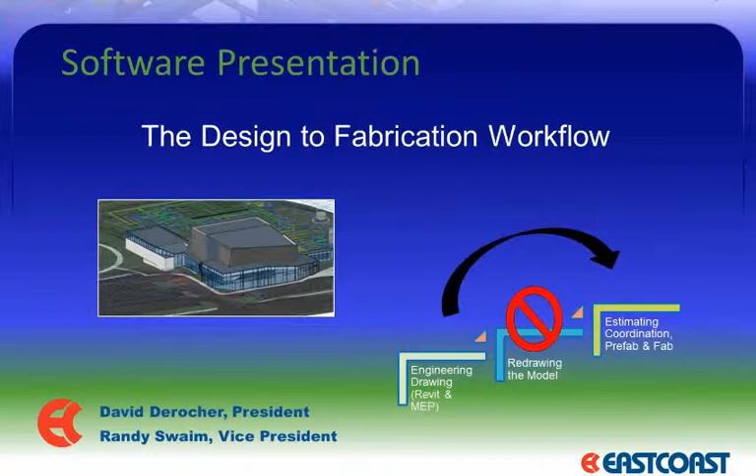And with that, I'm going to switch over to Randy Swaim so he can give you a presentation of how you can take advantage of the 3D engineering drawings that are becoming available. Thanks, Dave. We're going to take the design to fabrication and be able to bring the Revit model into AutoCAD MEP and assign it intelligent fabrication data up to 30 times faster than the traditional method of bringing in a background and drawing on top of it.

Now, we're not under the delusion that you can bring in a Revit model and just push a button and have it ready for fabrication. But you do get a good layout, and you can have an established workflow of how to go through and correct issues not caught by the engineer or not known by the engineer. In almost every instance that we've sold the design to fabrication software, we've taken a client's model, brought it in, and showed them the established workflow. In some cases, we've brought it in internally and then had our client bring it in theirs, and they exceeded our benchmark testing. So they've actually brought it in faster than what we did internally.

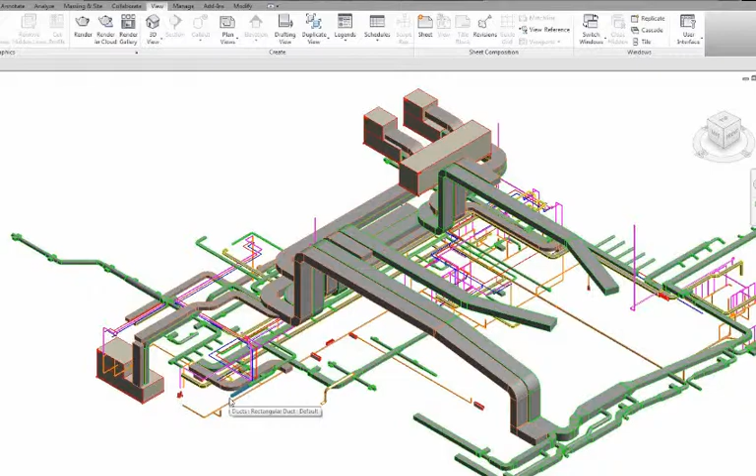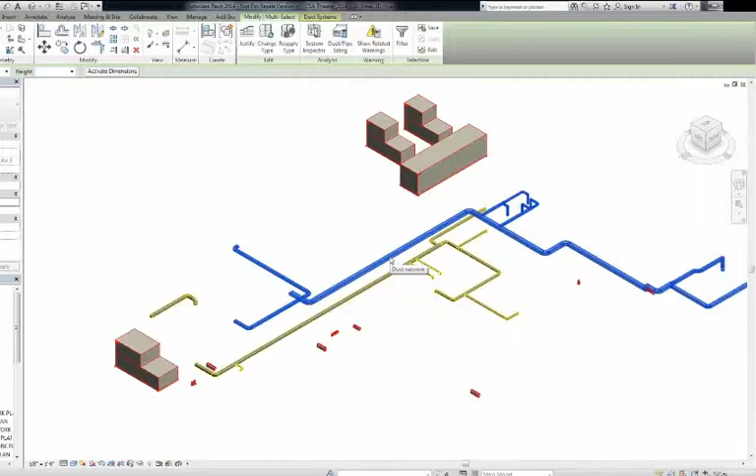So to demonstrate that, I want to take this Revit model and start bringing it into AutoCAD MEP and assigning it intelligent data as we do. As we look at the model, the first thing I'm going to do is come up here to the view, go to my filters, and turn off some of the items in the model so that I can just import a particular system. In this case, I'm going to start with exhaust. If I highlight over the exhaust and hit my tab key, that makes that selection. Now I just come up here and say I want to export this selection.

And as I export this selection, I'm just going to overwrite the file that I created earlier. So I'm going to make this my exhaust, and yes. Now I can come back here and say I want to hide that element, so when I come back to get the rest of that exhaust, this other is not already shown.

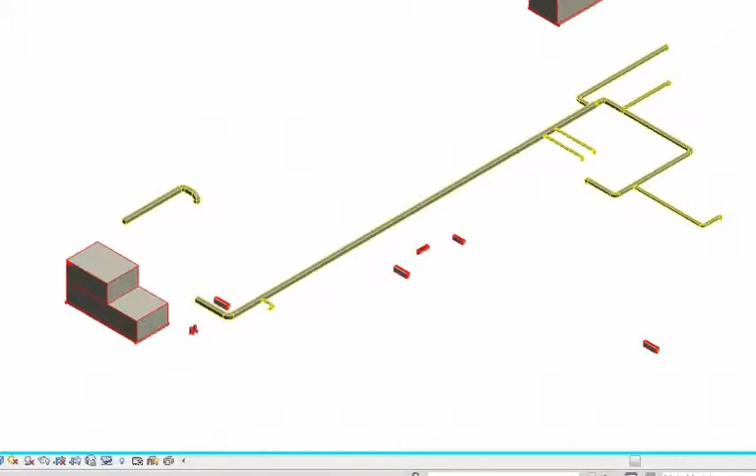So now I'm going to jump into the AutoCAD MEP platform, the preferred working platform. And as I move back over here, I'm going to come back in here and tell it that I want to bring in my duct. But before I do it, I want to show you what this is looking for. So if I go over here to duct fabrication preferences, it loads up here that I'm going to bring this in as a 2-inch water gauge spec. But I can have multiple of these setups set up into any folder I want, my low pressure, medium pressure, high pressure, and bring it into whatever pressure file I choose to.

So I've got it set to come into my 2-inch, so all I'm going to do is come up here to go to my insert. I want to insert a Revit model, and there's that exhaust. And we're going to let that bring that in. And you'll notice down here in the lower left-hand side of my screen, there's a little status bar that's indicating the percentage complete. This little exhaust model might take a minute to come in.

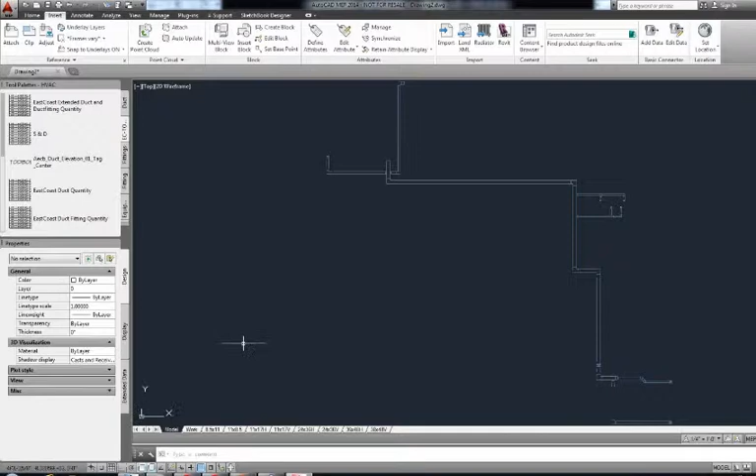But when it brings it in, it's assigned intelligent data. It knows that it's got slip and drive connectors. It knows that it's a certain gauge and certain locks, everything that's going to be needed for fabrication. And you can see that's brought that in.

I'm going to go ahead and flip this over into an isometric plane, and I'm going to run another command on this. So I'm going to come right back here to home and say, let's go through here and break this down into my fabricatable sections. So based on the connector type and our sheet width, in this case we're using 60-inch sheets, and it's going to be a slip and drive connector, so we're going to end up with finished joints, or 59-inch joints in here. So we'll let it go ahead in there and run the duct break on it.

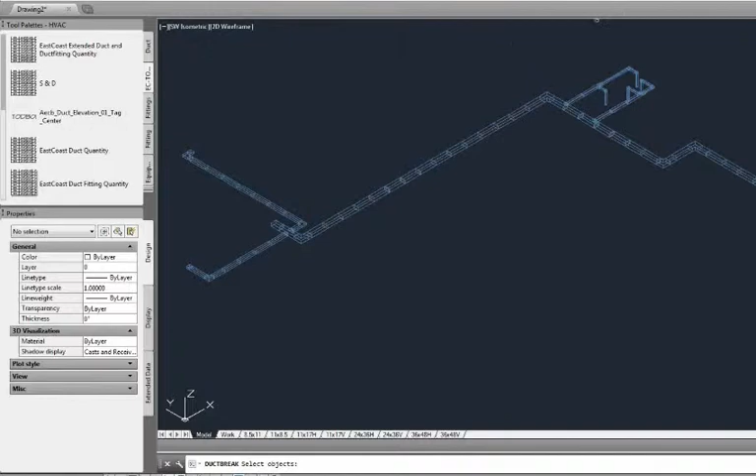And then as we move back in here, if I click on any one of these parts, there's that elbow right there, and I go to the Extended Data tab down here, here's all the information of how this ductwork is being fabricated. That was assigned from basically a dumb model coming over from Revit.

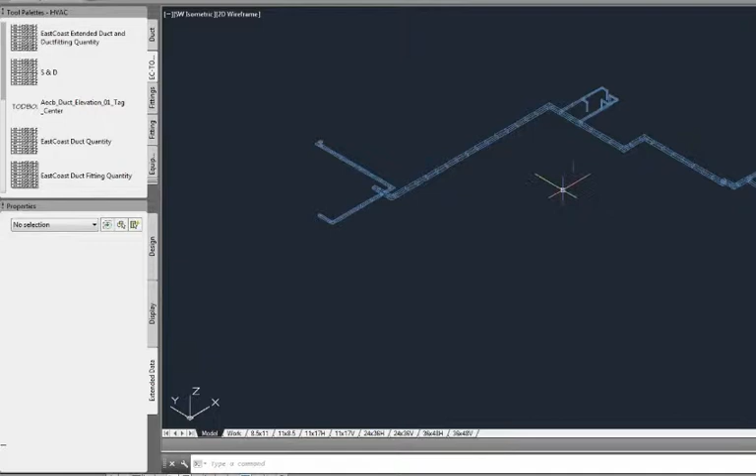But we want to come through here and we want to establish our workflow and clean up a few things in the drawing first. So if I just come down to my command line here, I'm just going to type in display, and I want to go ahead and add a display theme. I've set this display theme up to come through here and highlight for me joints under a certain length. So I can make decisions of what I want to do by clicking onto a joint and saying, well, maybe I want to go ahead and add that to the throat of that elbow to eliminate that short piece.

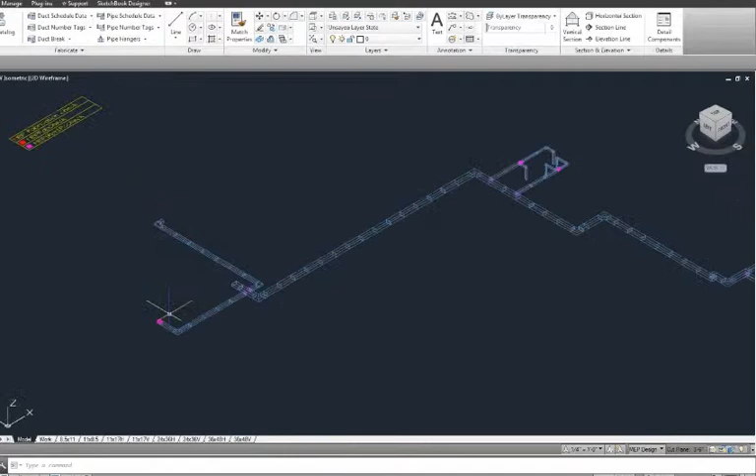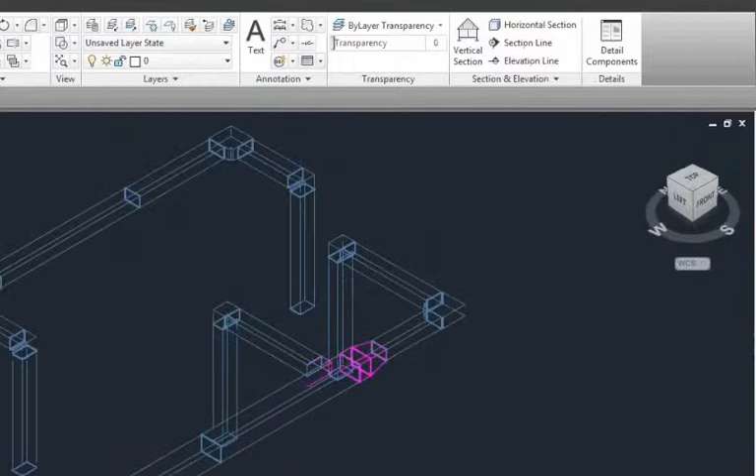When I move into a scenario like this, maybe I need to have that end at that location, but I can also move this along the line to put it back here, or I'll say go ahead and add that to the throat of the elbow. As we move down our model, I'm going to go ahead and make these corrections. So I'm going to click on this short piece and say I want that to be added to my transition. When I come over here, I'm going to do the same thing on this one. I want to add that to my transition.

And now we'll just move over here. We've got a couple more pieces that I want to correct. There's a very short piece I want to add to that elbow right there. So I'm just going to go ahead and modify that. And then here it looks like they've got a short piece here I want to get rid of. So I'm going to go ahead and modify that.

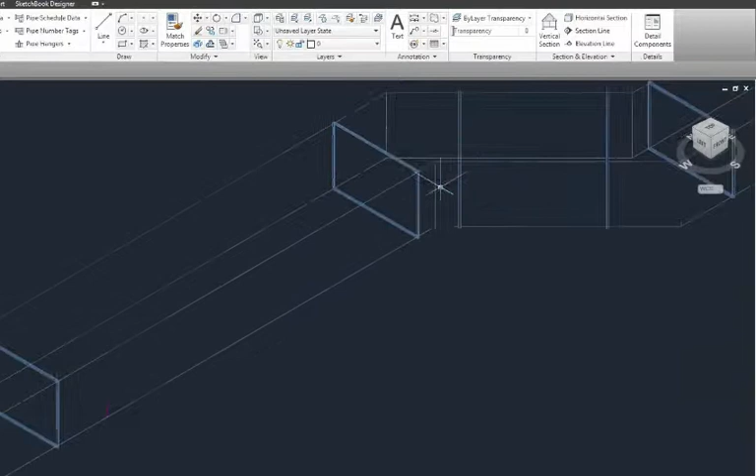But here they've used, it looks like, 3 fittings here to do a little offset. I'm going to take this offset and just get rid of that by hitting the delete key. And now I'm just going to go ahead and click onto this piece and click onto this piece. And up here now I can tell it what kind of fitting I want to insert in there. I want an Ogee fitting.

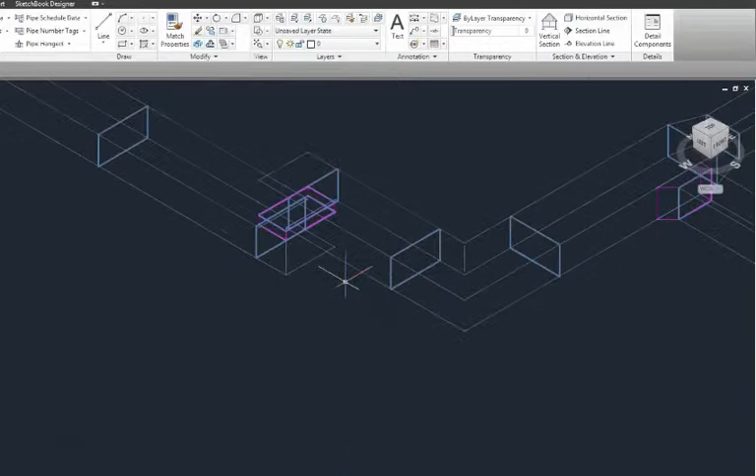So I'm going to say go ahead and apply that. So that's applied that fitting for me. As I move back down here in the model, I also notice another scenario here where they've added quite a few pieces in here I want to get rid of. So I'm just going to go ahead and select some of these pieces to delete. And I'll get rid of that one as well.

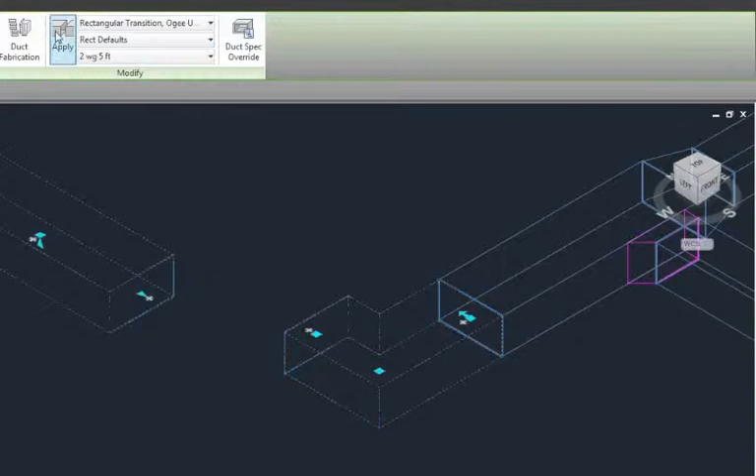And now I'm going to come back here and I want to add that in. So if I come back here, click and click here, we'll just come back over here and say now we want to add in an Ogee offset here. We got rid of 4 fittings and replaced it with 1. So now we have our model here. And I'm going to go ahead and set this back into plan view. So I'm just going to go ahead and hit the top view here. I'm going to spin that back around to the position I want it in, and we'll set that up here.

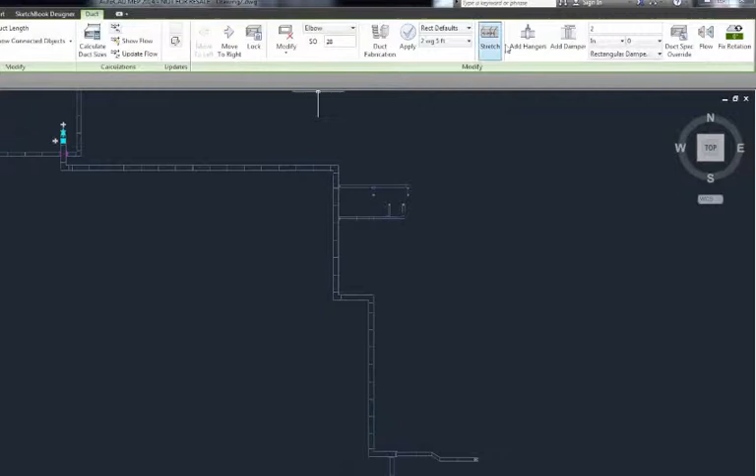So now as I come back here, maybe I want to come back in and add some additional information here. Maybe I need to add some hangers into this. So by just clicking onto a piece of duct here, I can come back in here now and tell it that I want to add my hangers. So as I go to add hangers, I can give it all the information about my hangers. I can give it the elevation I want to hang from up here.

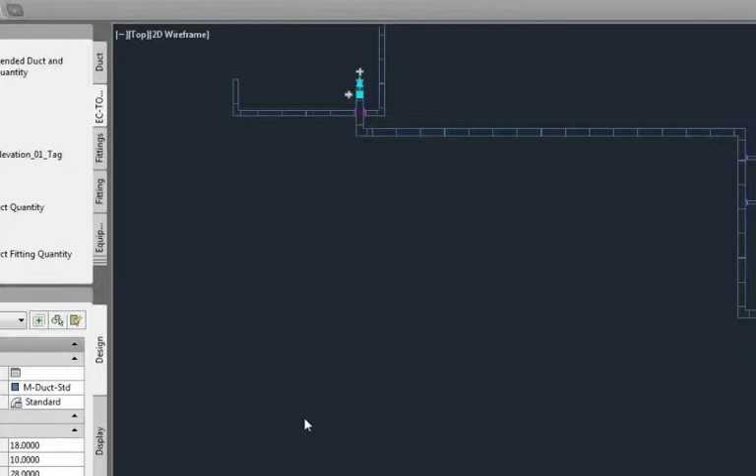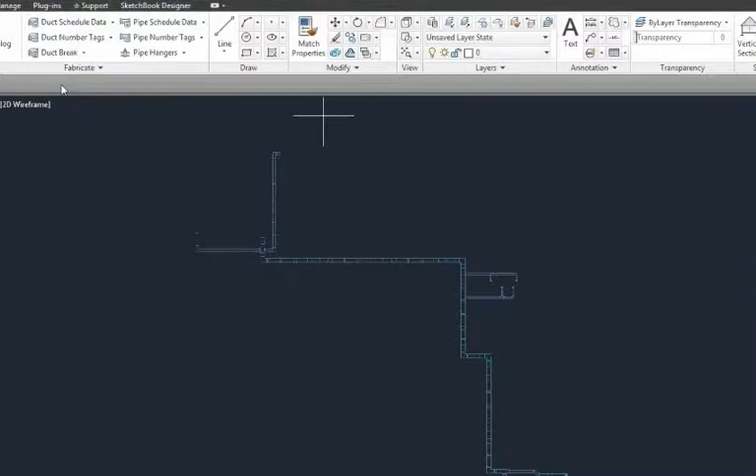But now maybe I want to come back and put some part numbers or some text down on this. So by coming back here, I'll say I want to put part numbers down. I want to go to my duct part number. I want to attach that to the model. And I have lots of variables here about how I number the ductwork. Different frames to put the numbers in, how many digits, do I want to assign a system to it, what type of duct do I want to number, a lot of different information. I'm just going to go ahead and hit OK and then just touch my first piece of duct there and let it go through the numbering process.

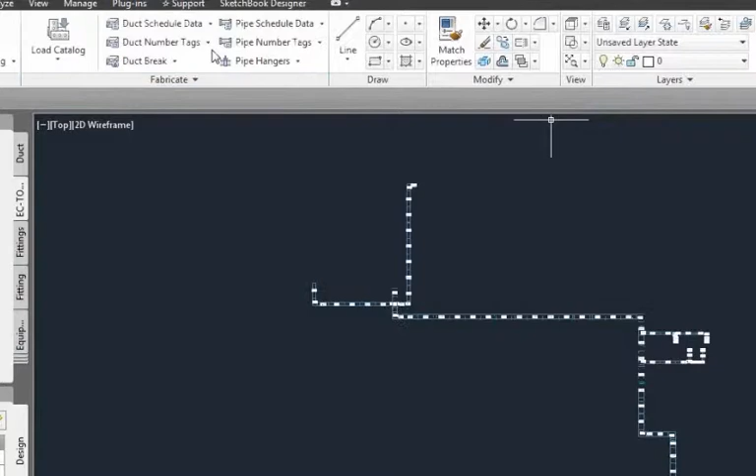We also have the ability to come in here now and say maybe I want to auto tag part of this. So simply by coming over here and selecting part of that run, I can have it put automatic text information here for elevations, sizes, etc.

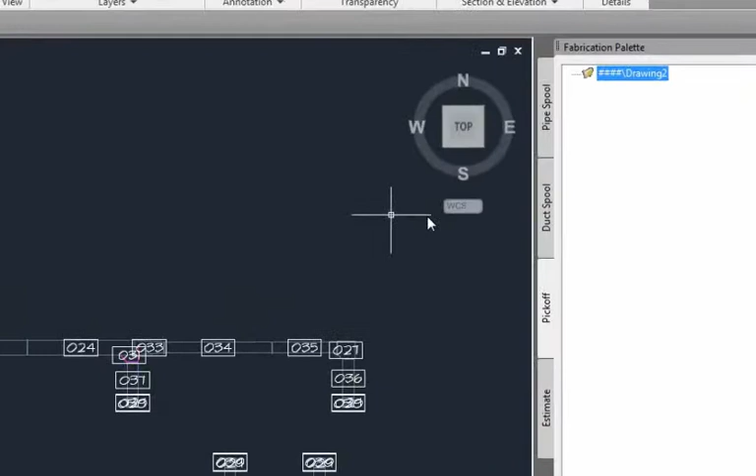But when I come back now, maybe I want to start fabricating some of this in my shop. So I'm going to go back here and open up my fabrication palette, and I'm going to come over here first of all and say maybe I want to create a duct spool, and I want to add a new category, and I'm going to rename this category to be Exhaust 1. So we've got that as our category. Now I'm just going to say I want to create this as a spool. So maybe I want to take, let's say, these two pieces of duct and that tap right there, and I want to create those as an assembly.

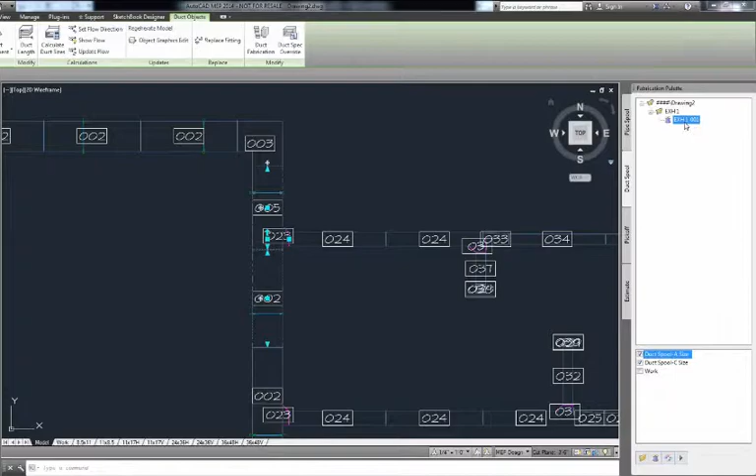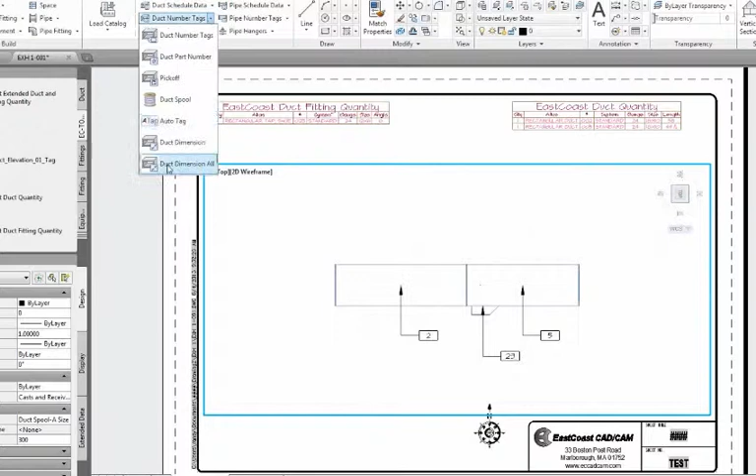So as I go ahead and right-click, it now can generate me a drawing on that by just clicking Generate and then clicking Open. And now I've got a drawing here with the two pieces of duct and my tap, with the cut lengths of the parts and the counts of the fittings. But this is a viewport, so I can say, well, I'd rather see this maybe in a plan view, maybe running this way, and now go back and reattach all the part numbers. Then maybe I want to add the duct dimension as to where we cut that tap in. So just that easy, we can create fabrication drawings of manifolded systems. Next, maybe I want to take this right down into fabrication.

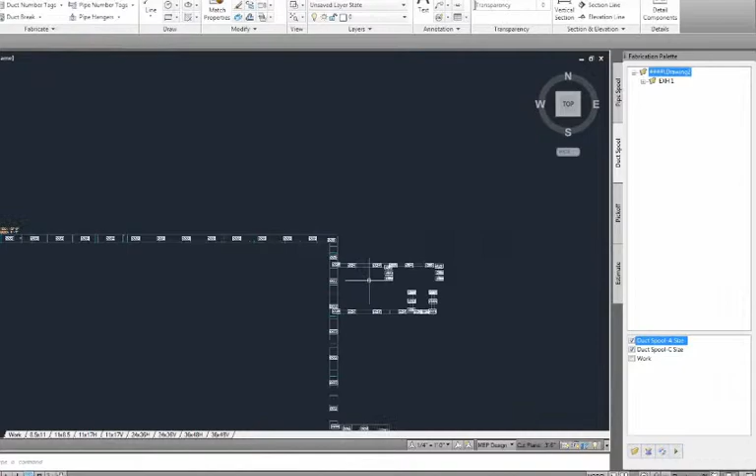So I'm going to come over here and I'm going to say I want to close this spool drawing. Let's go ahead and close that out. I'm going to come back now and say I want to do a pick-off on this duct. So as I go back to do a pick-off here, again, I'm just going to define what I want to pick off and tell it, do I want to pick off both numbered and unnumbered, the shapes, the statuses, and we'll go ahead and we'll just select that.

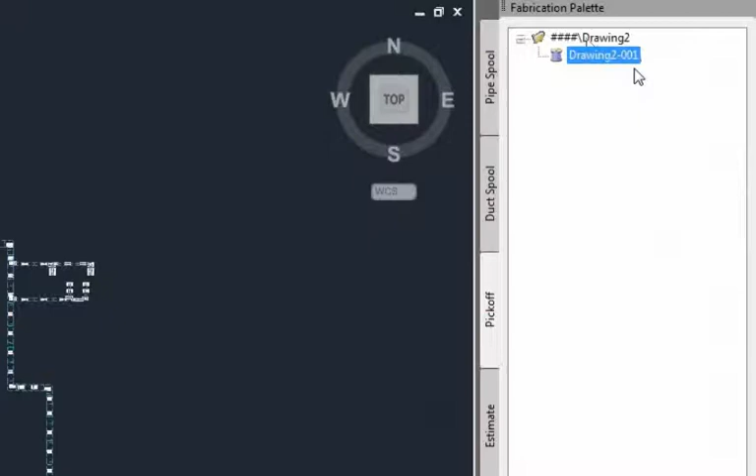And now that's created me a pick-off file over here that I can now come back and say, let's generate that file and send that into our CAM software. So by going ahead and hitting Generate there, that's generated that file for me. Now on this elbow right here, that's elbow number 41, we extended that throat quite a bit on that.

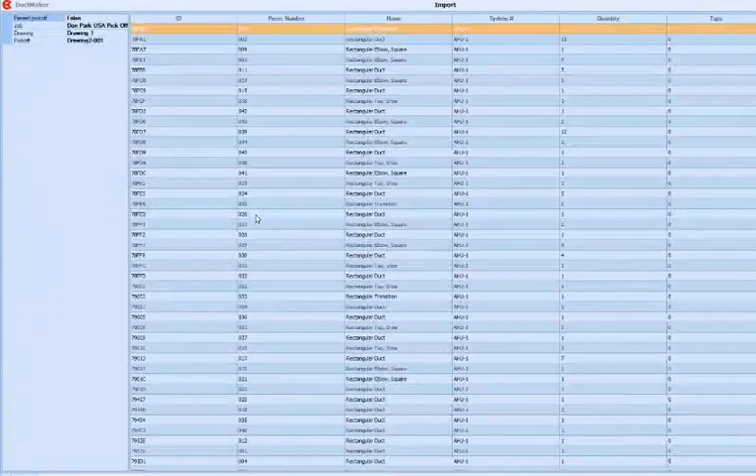If I move down here to my DuctMaker program now I want to import that into my CAM software. So I'll know that that's going to be in my documents and under my drawing 2. And as we come back in here, we'll see here's today's date with that pickoff. So I'll go ahead and bring that in. That's brought all that information into the CAM software. This is now ready to nest and create tickets and various reports right out of the CAM tool.

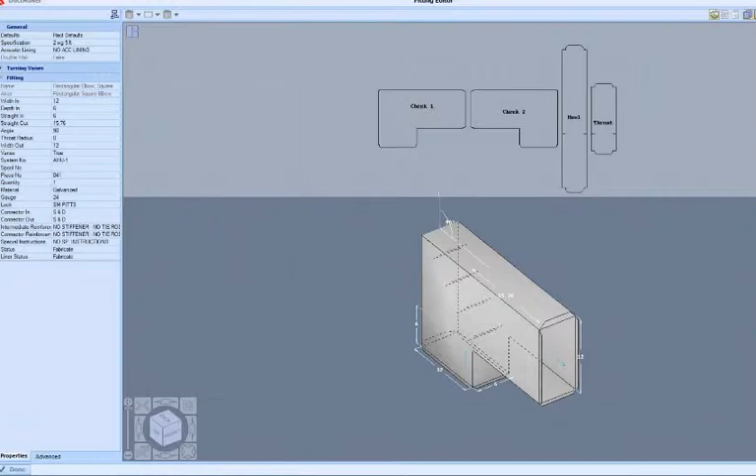And if we come through here and we look at elbow number 41, as I move down through here to find that elbow, I'm going to see where that one is, and we'll just look at that. And now you'll see that that brought that in with the extended throat on that. So that's all been brought into the CAM software. We simply just go to Layouts, say now go ahead and create the nest. And now it's going to create all my nesting diagrams for all that ductwork. And now the tickets, the reports, etc.

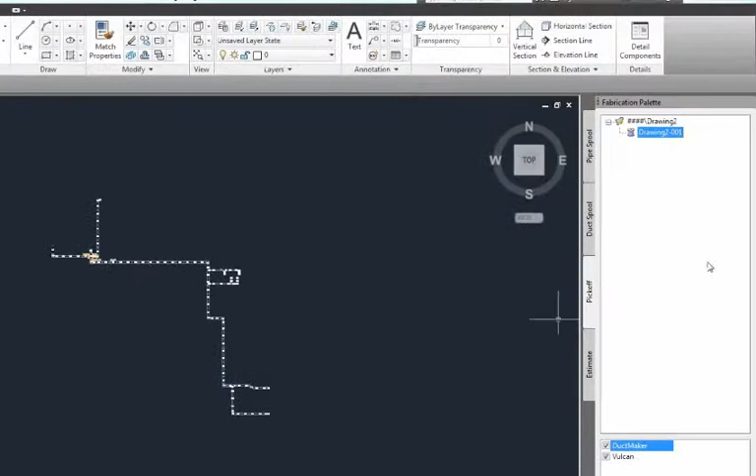But I want to go back into the model now, because now I want to take this and I want to send this out to estimating as well. So I'm going to come over here to Estimate tab and just say I want to attach my estimate data. So as I go ahead and swipe the model here and enter, that brings up my work structure breakdown.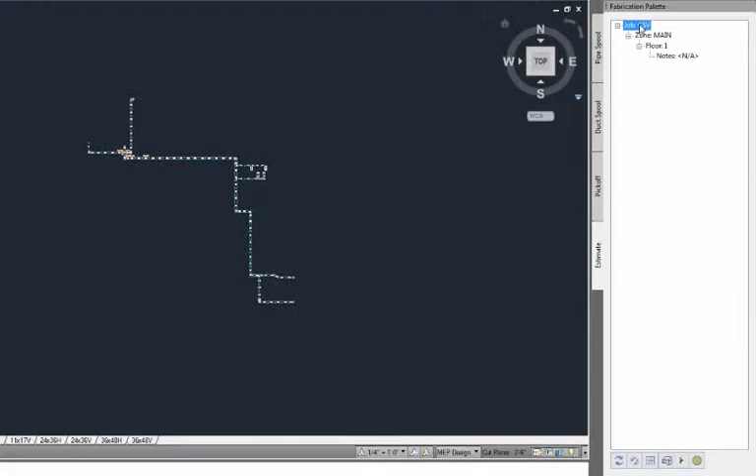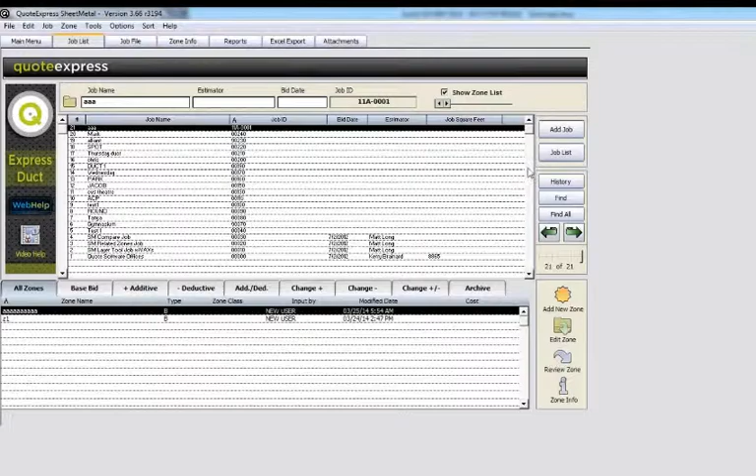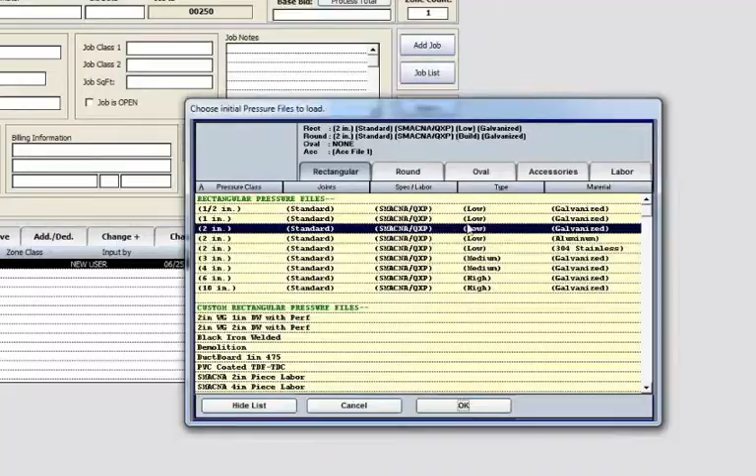Now from that point, I can come back and I can open up the QuoteExpress SheetMetal estimating program. I'm going to go ahead and maximize that. And I'm going to go to my jobs and I want to add a job. And again, we're going to just add this CSV job and OK. Now when I come back over here, I want to add a zone. And again, I called that main. And we'll just OK that. So now it asks me here what specs do I want to map this to in the estimating. So it goes through here and it does your mapping for you.

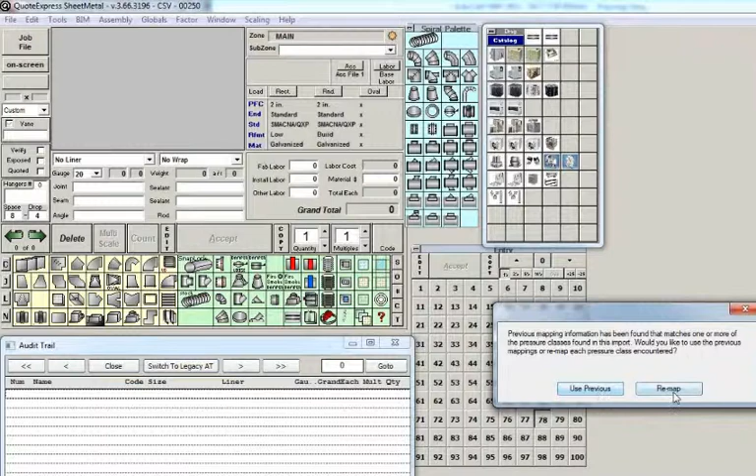Okay. And now we're going to come back here and say, let's go back up here to BIM. And let's say we want to import that EastCoast CAD file. So I'm going to say I want to import the file. And again, here's that exhaust file right here. So I'm just going to double click that and let it start importing it. But it's going to ask me a couple of questions first. It says, do you want to use the previous spec mapping or do you want to remap? If I say I want to remap, I'll just pick the pressure file that I want that to come into. Now it's asking me about the liner and the wrap, and I'll just say use the previous files on the liner and the wrap.

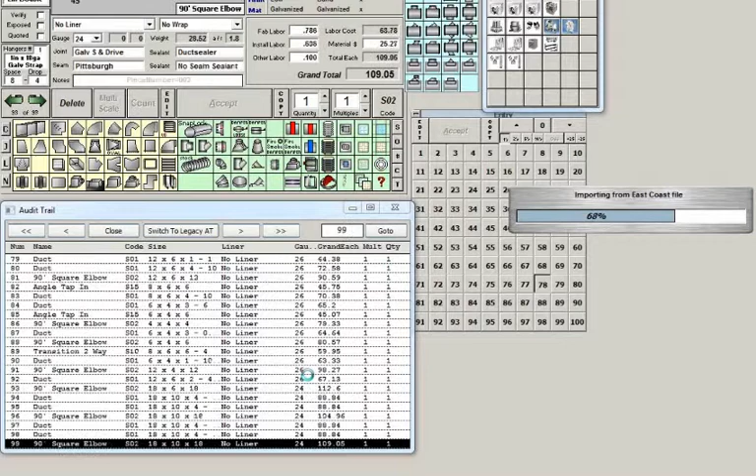And now it's generating us an audit trail of everything in that model to get our estimate data off of. So it's going to estimate this project with your data based in the QuoteExpress estimating product. And we'll let it go ahead and finish bringing in all these parts, and then we'll look at what the total is on the estimate. So you can see it's just about done. It's about 80% complete. And we'll let it go ahead, and then we'll jump back here to the zone and get a total on it.

That brings in all of our items for us, and we'll just go through here and OK that.

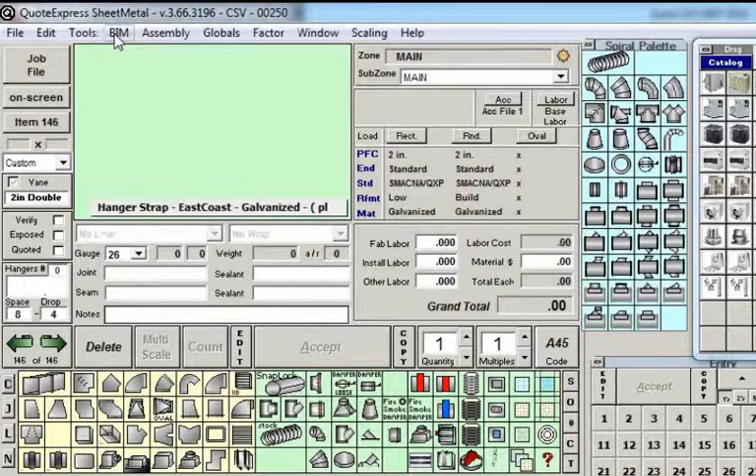Now when I come back here, if I go to File and say I want to go to my zone information, it's calculated that little exhaust system was worth $8,637.77.

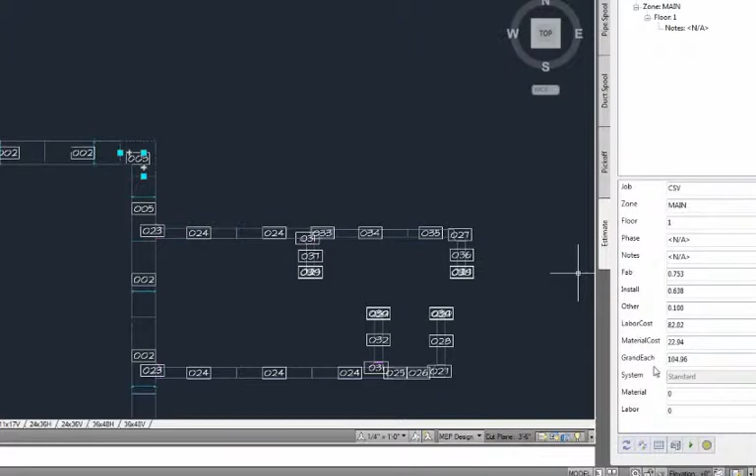When I come back into CAD, I'll open this back up, click onto the Quote Express icon, and import that labor and material back into my model. Now when I click onto this part, here it has my breakdown for fabrication, install, everything built out, and that one elbow is worth $105.

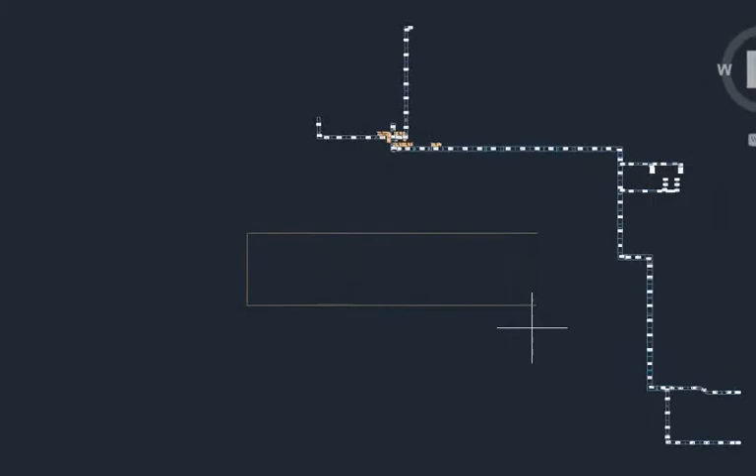We can come back and run different reports out of the CAD model by coming over here and running an estimate report. So by saying I'm going to install this section today, I've got my total hours listed out right through here. Total install there is 22 hours to install that little portion.

That's how we take that all the way from Revit down into AutoCAD MEP, assign the intelligence to it, and then send it out to fabrication, to estimating, and to create spool drawings. Thanks, Randy, appreciate it.

At the beginning of the presentation, we talked about BIM bringing opportunities and challenges to contractors. We've discussed lucrative opportunities, but I also wanted to explore some challenges. Project deliverables for communicating with other stakeholders are changing. They vary widely from project to project, and they're not always well understood, even by the folks making the requirements, so they're not always clearly defined.

Some of the more common deliverables include DWG, DWF, and PDF for approvals, Navisworks for coordination, DWG ACIS solids with annotations, RVT and IFC for as-builts, and IFC with COBie data for facilities management. ECCAD for AutoCAD MEP provides lots of functionality to share model data in various formats and currently supports DWG, DWF, PDF, Navis, ACIS solids with annotations, IFC, COBie, and more.

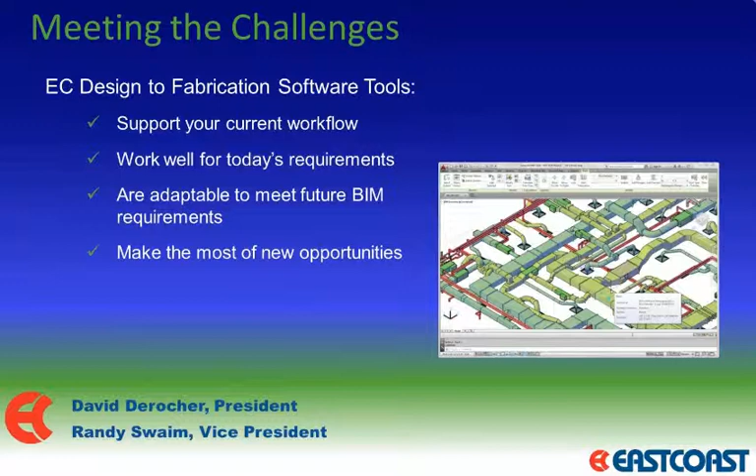We mentioned during the presentation that we're going to be pushing data back into Revit. Randy showed you how you could take a Revit MEP model and bring it into our AutoCAD MEP program so you can apply all your fabrication detail to the model and work in a platform that's more familiar to a lot of contractors and has more proven reliability for contractor detail.

But we recognize that some folks are seeing a requirement to present the information back into Revit MEP, most commonly for your as-built information. We are actively working on that project. It's well underway, well understood, and you'll be seeing that in the next release of software we provide.